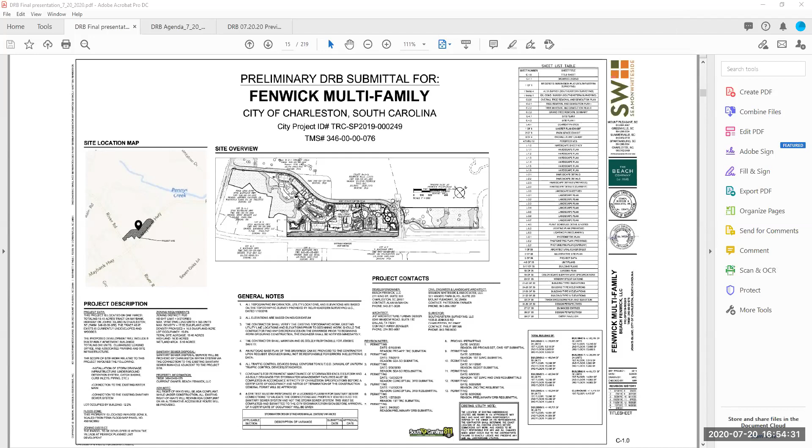We can look at the architectural sheets, starting with the elevations, if you would like. Okay, thanks. David, could you scroll to those, please? Sorry, elevations? Yeah, yes sir, if you could skip over the site.

Sorry, is this a good place? Yeah, if you could maybe go about the 10 architectural sheets to the elevations, please.

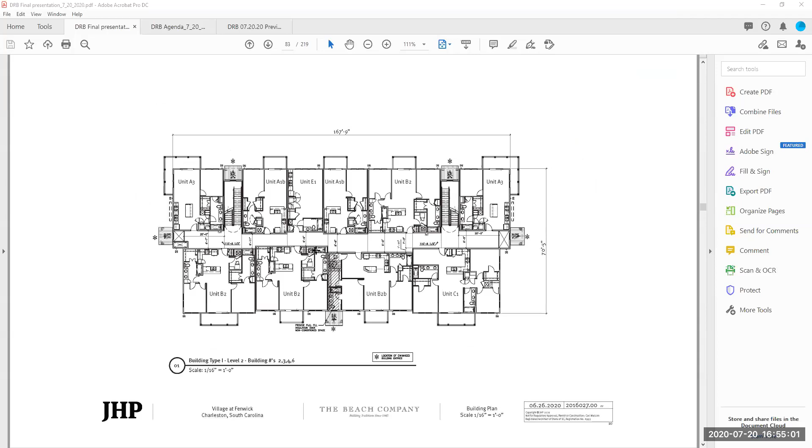It looks like Patterson's joining now. Patterson, can you hear us? Yep, I can hear y'all now. Can you hear me? We can, yes. Great. Apologies for that.

If you could go back a sheet or two to the color palette. Perfect. So from the last review meeting, some comments focused on the color palette for the project, as well as detailing regarding dryer vents and downspout locations and placements. We've updated the architectural package showing the color selections with representative images.

We've also shown the dryer vents and downspouts on the colored elevations, which was also requested. In addition, we provided a drawing for a trash enclosure and some additional adjustments to the proportions, batten spacing, and color callouts. For example, we're proposing coloring some of the soffits with Olympus white, that light blue color you see on the rendering on the south of the page. Let's go to the next PDF.

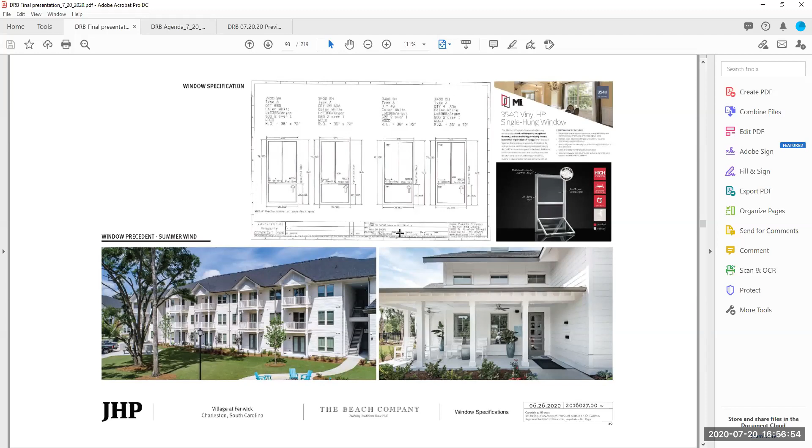If you want to flip through the other elevations - it's a little hard to see, but on the lower image, which is indicative of all the elevations, there's a little 'DS' signifying where the downspouts are. We tried to show them as best we could - they're painted white to blend in with the field color, so it was a little difficult. You can also see the dryer vents shown there, and the colors were adjusted a bit to reflect the actual color swatches we selected.

You can kind of see they're more of the same - downspouts, dryer vents, adjusted colors. You can see the drop beam on those corner projecting balconies was also picked up. So some minor detailing along those lines.

If you don't mind going to the trash enclosure, since it's a new drawing. The trash enclosure is added, and again we're trying to get it to fit in with the color aesthetics of the overall project.

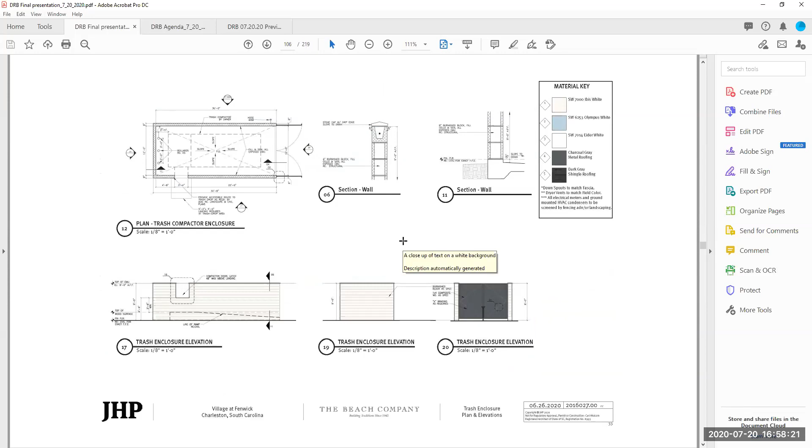If you go maybe one more page - similar here, you can see the drop beam was added at the top level of the wraparound balcony. Some of the soffit detailing is picked up with the batten trim and the colored soffit. You can flip through it; like I said, the majority of the changes were fairly minor.

Again, similar, showing some of the color palettes and soffit treatment.

How are you doing? Good. I'm in the middle of a Zoom meeting right now, but I can barely hear from the laptop. Let me tell them - excuse me, folks, I'm going to mute my system for a moment.

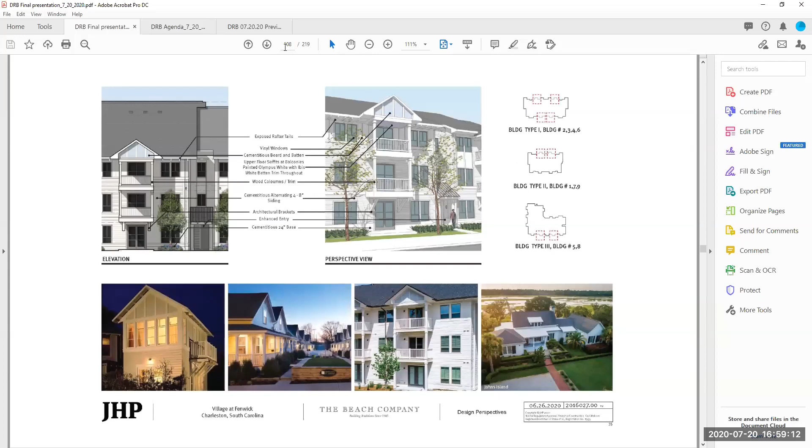If possible, could you go to the last couple of elevations? Does anyone else have access besides David? David, could you advance the slides?

David? These are the entry designs we've looked at before. There wasn't any major changes there, and that's true for the next couple of slides. So as I mentioned, the majority of the items were the windows, downspouts, dryer vents, and adjusting some of the colors and proportions a bit. I think that's really all I had to comment on. Thank you.

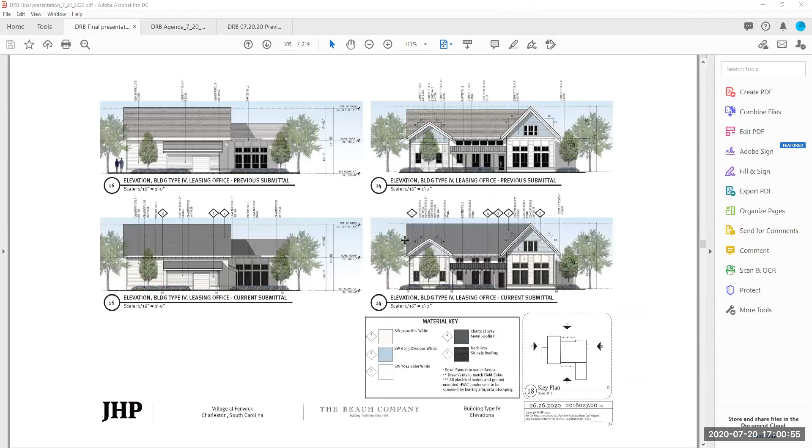Cecilia, if you want to direct where he needs to flip to. This is Cecilia Probst with Seamon Whiteside. Would you mind going back up to the beginning where the perspectives are? Sure, perspectives. David, could you scroll back please? The Lumion ones first, yeah, those - the first one.

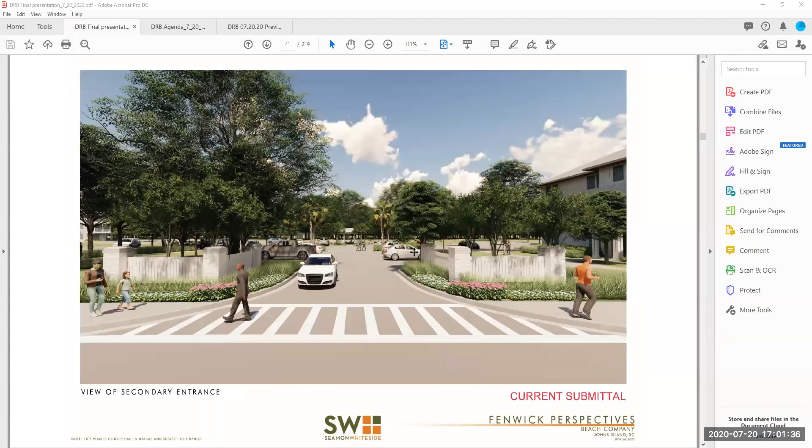The site plans. So we took your suggestions from the last submittal and studied the signage feature at the entrances, and came up with a new sign that we feel better complements the buildings and the color scheme of the architecture. If you move forward to the next perspective, you'll see before we were going with a darker gray one.

The current one is white to match the buildings. I don't know where the other ones are - you just had it there. So thank you for your feedback on those. I think the current ones we're proposing are much better. Okay.

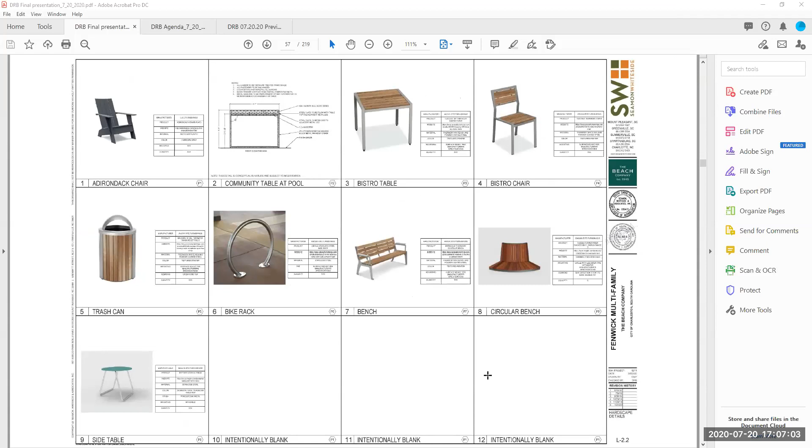I was wondering if we had elevations of the smaller park structure as well anywhere. This is Kirby at JHP. I thought they were included on the same sheet as the larger pavilion. Okay, I'd have to go back and double check.

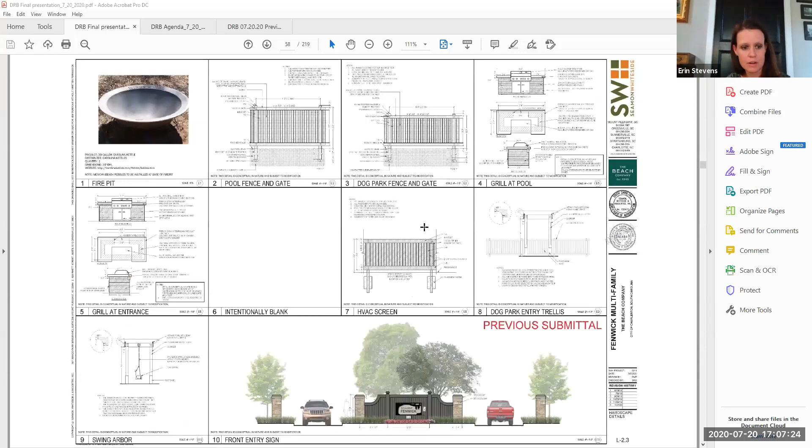David, if we want to pull that sheet up, it was the last page of the submittal for this project. I've added some things, but this was the last one they included. Yeah, it actually doesn't look like it made it to that sheet.

Is there, are you referring to the one at the end of the secondary entrance at the terminus of that? Because we do have it in a perspective, if that helps. Okay, yeah, if somebody could let me know the page number. That would be at the very beginning of the submittal.

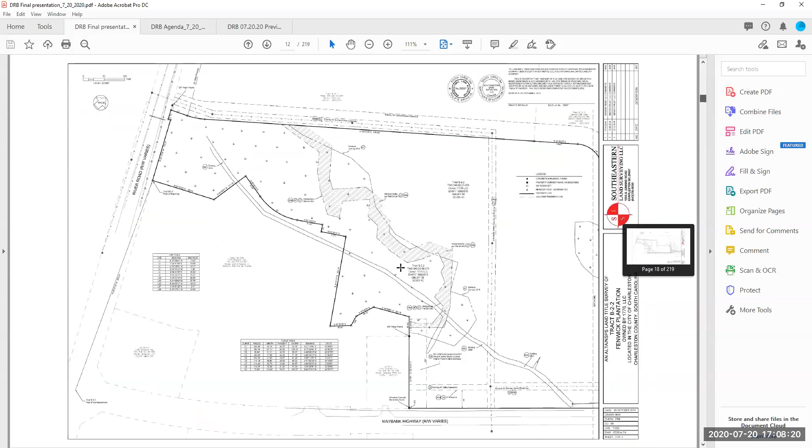Move this. Yeah Dave, I think in the back of those perspectives that we were looking at earlier, we were discussing the signage revisions. It's on page 32 of the submittal package. There, yeah, that one, you just had it. This one? Yeah.

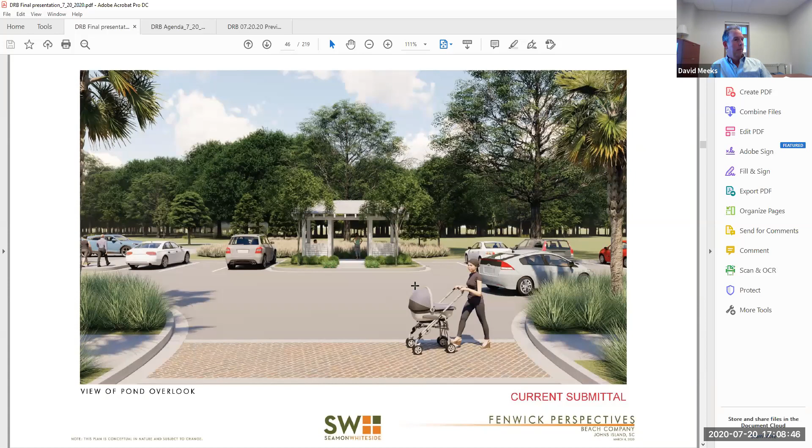Excuse me. Bless you.

Those are all the questions I had. I have a couple more questions. This is Jeff.

With the supplemental information that came in today's email about the exterior building lighting, there were 2 fixtures provided: one that looked like a round can on a stem, and the other a building-mounted sconce, black in color. I don't see where those are shown on the drawings, and I'm curious about the strategy for which one goes where. I presume we've only submitted 3 lights, these 2 plus the pole lights. Is there any other building-mounted lighting?

No. The intent is to have the lantern light at the building entry points, as well as the individual unit patio lights. The other light in this package would be used on the building where you need additional light, say at the end of the buildings where there may be dark spaces between building ends, used as more of a general building light as needed, whether for signage or to add additional foot candles to the site. But the intent is not to add a bunch of extra building lights on the exterior outside of these two types of fixtures.

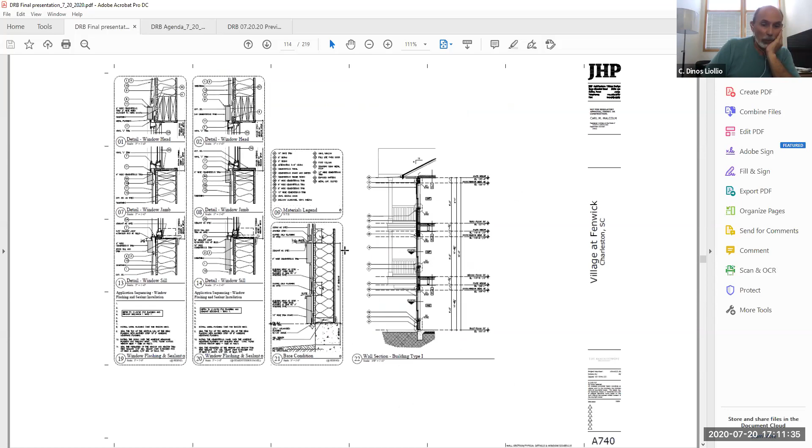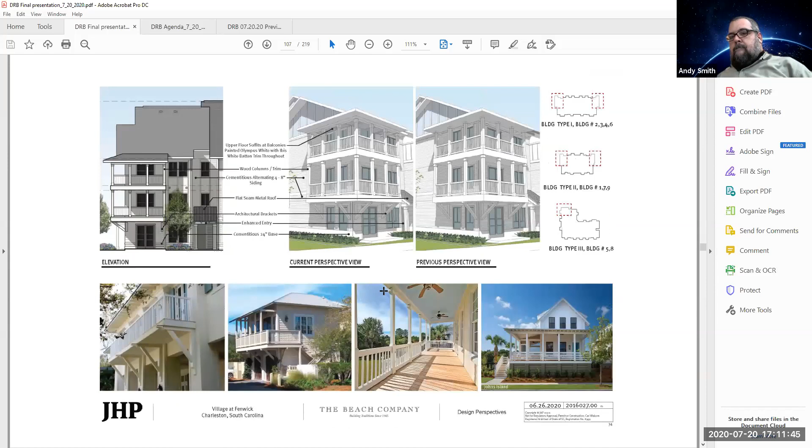Thank you, Kirby. This is Dinos Liolio, just a quick question, a simple one. On my drawings, it's the perspective that comes in after the view of the pond overlook, labeled view of streetscape. Is there a page number, Dinos? Mine shows page 32 of 98. It was an overall site perspective?

Yes, maybe in the civil streetscape renderings. It is in the civil renderings, okay, I believe that's where it's at. The question I have is very simple: there it shows a very light roof color. And when I look at the elevations, it looks a little bit darker, almost a charcoal or dark gray. What direction do you guys feel you're leaning right now? Because the lighter color looks really nice, and I was just curious.

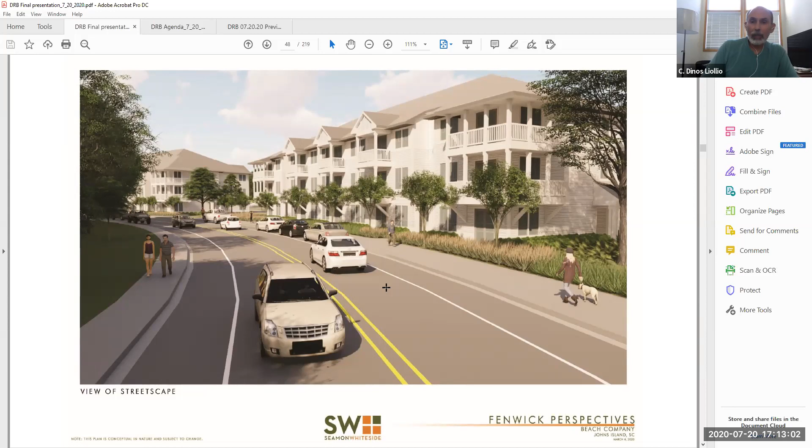Currently we're proposing more of a charcoal. The shingles have some limited color palettes, and some of those grays can wash out pretty fast. We like the idea of having a little bit more of a contrasted roof element with the kind of light and light blue color palette of the building. Okay, I was just curious. That's all I had, it's a nice project.

Any other questions? With none, we do not have anyone signed up for the public comment period, nor do we receive any comments on the city's website or via email. So David, staff recommendations, please.

City staff finds this is a nicely designed and well-proportioned project with well-placed amenities, the preservation of many grand trees, and nice site furnishings. Staff would like to see more specialty pavers at the secondary entrance, as was done at the primary entrance. Staff comment 3 is regarding the notches in the roof.

Oh, I have an illustration for this one. Regarding the notches in the roof of the building above the entrances, staff was first going to suggest to remove them, but then thought it might look interesting to extend the rafters so they are exposed in this area and connect to the eave. The rafters and the eave would be decorative in this notch. Let me point out where this is.

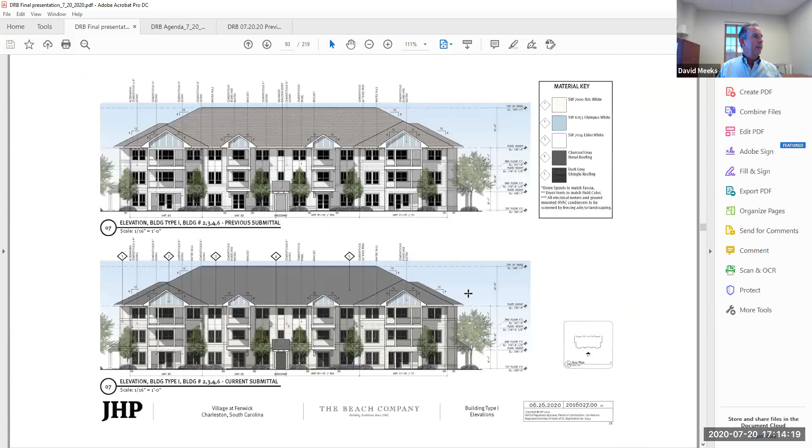So in these two locations, there's a notch above the entrances. We were thinking it might be interesting to have the rafters extend out here, just a suggestion. But that's all we have for staff comments, and we recommend preliminary approval.

Thanks, David. Board discussion. Kirby, or anyone from the team, do you have anything you'd like to clarify from David's staff comments?

No, ma'am. We can look at addressing the notch, see if we can do something a little bit different there. And that's only if the board adopts it. Understood. Thank you. Okay, thanks.

Then time for board discussion and a motion.

This is Dinos. The rafters are not exposed, is that correct? And the lookouts, they're all encased within, if I remember the details, within the context of soffit and fascia.

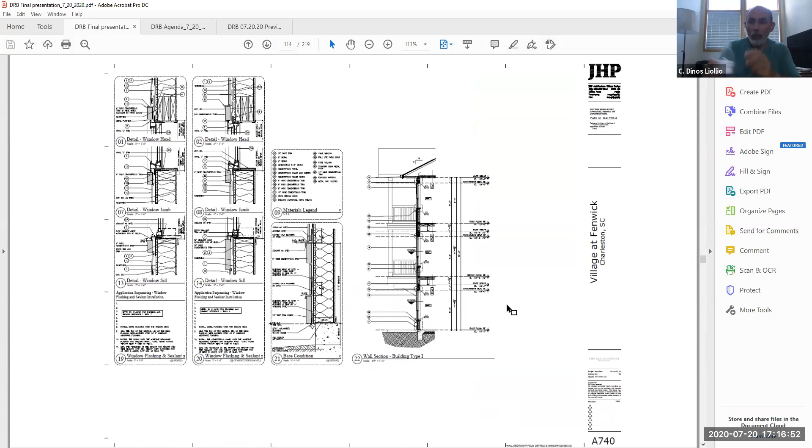The applicant had sent over some additional drawings today, and we were asking about the single hung window at our last meeting. I'm a little bit concerned that the windows, not having a great depth between the frame and the trim, might come across on the building as being a little more flat. Looking at our DRB policy, we talk specifically about the face of the window frame being recessed from the trim to provide depth, as if it were a traditional window. And the trouble with these single hung windows is just that the frame is very close to the wall siding.

In other projects, and you can zoom in on these details, would be a great example of the window itself being close to the trim. Any one of those, top left. Oftentimes in projects like this, the window will be set in one stud. You see that triple header there on the head, detail window head. There's three studs there at the head. Oftentimes a window will be set in at least one stud to give that a bigger offset.

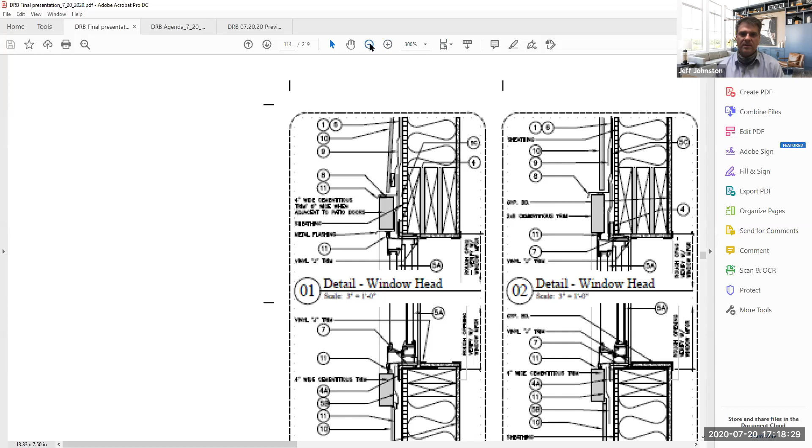That's the big concern for me: we've got a big building and these windows are fairly flat to the trim, and it would provide a little bit more shadow and relief if the windows were recessed back as per our policy statement on windows.

Yeah, I think it's a great point, Jeff. I think that would give a nicer shadow too to the overall building.

The additional sections here were helpful, and I appreciate that. Certainly would expect that, David, should this go forward in the final review, that he review these sections. The one wall section we received showed an enclosed or encased soffit, and Dinos, to your point, you asked if there were other porches that had exposed rafters, and the answer was yes, but yet the section that we have didn't indicate that.

So there's a lot of detailing to this building, and it's wonderfully detailed, at least from these very conceptual—I know the information presented is somewhat conceptual in nature. It's not until you get to the level of detail shown on this sheet that you really understand what things are and how they're executed. That execution level is important to the quality of this type of project.

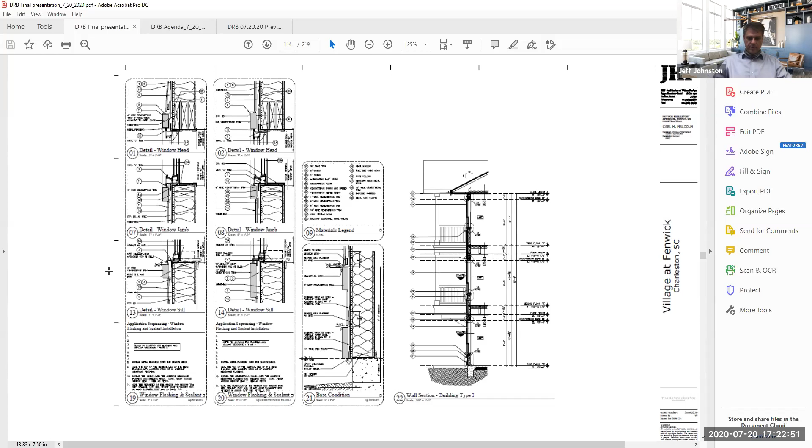Is there a motion? I'll make a motion for preliminary approval with staff comment number 2, I think that's the only one, and board comment number 1, to recess windows further into the wall cavity to provide shadow and relief for our policy statement.

Hold on one second, Jeff. I'd prefer those details to be shown back to the board, communicated to the board, I should say. Recess windows further into wall cavity to provide shadow and relief in accordance with the board's policy statement.

Submit section details of all building conditions. Provide a lighting plan that shows locations of all building mounted lights, not signs, lights. And then eliminate gravel as mulch and use natural materials. That's it.

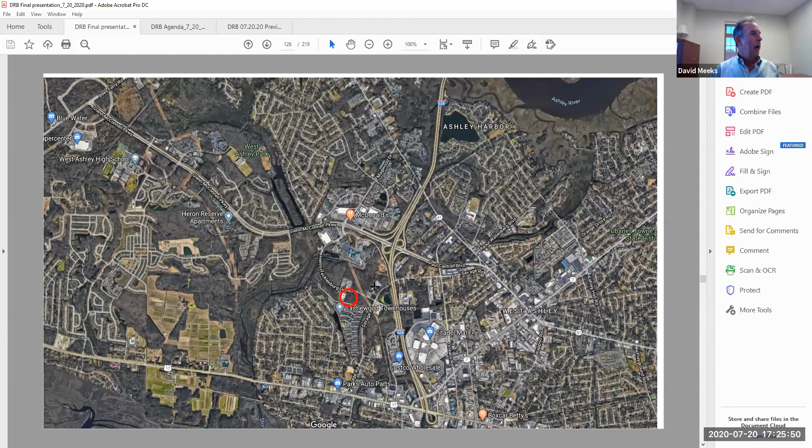We will now be moving on to agenda item number 3, 2280 Henry Tecklenburg, requesting conceptual approval for the construction of a new 1-story dialysis center. This is a new project. For those who haven't seen this, the red circle is the location on Henry Tecklenburg. Here's a closer view, and this is looking into the site. It's currently wooded. That's all I have, so I'll turn it over to the applicant.

Okay, this is Randy Dover. Can you hear me? Yes. Okay good, Ken, thank you. I appreciate y'all's time today to go through the project. Is 10 minutes about enough time for you? That's plenty to go through this initial presentation. Okay, great, thank you.

Quick overview: the site is at 2280 Henry Tecklenburg Drive. It's adjacent to a memory care facility, the only other project on that side of the street for about a 2-3 block area, with one across the street as well. The site is 2.391 acres as we now have it determined. The owner is Dialysis Clinic, Inc., the largest not-for-profit dialysis provider in the country, with over 300 clinics, including several in the Charleston area, including one over 38 years old that this one will replace.

They're a good neighbor, been there a long time, and intend to stay. Their patient load continues to grow, sadly, and they need a new facility that can do things the current one can't. So we're looking at this site. My firm is based in Nashville, as is Dialysis Clinic, Inc. We've done over 500 dialysis clinics in 38 states, at least 11 in South Carolina, so we're used to working all over with a group of people who know dialysis well. We also want to be good neighbors and do projects that are long-lasting and well-accepted. DCI isn't going anywhere; they'll be around a long time and want this to last. We want to follow your standards as best we can.

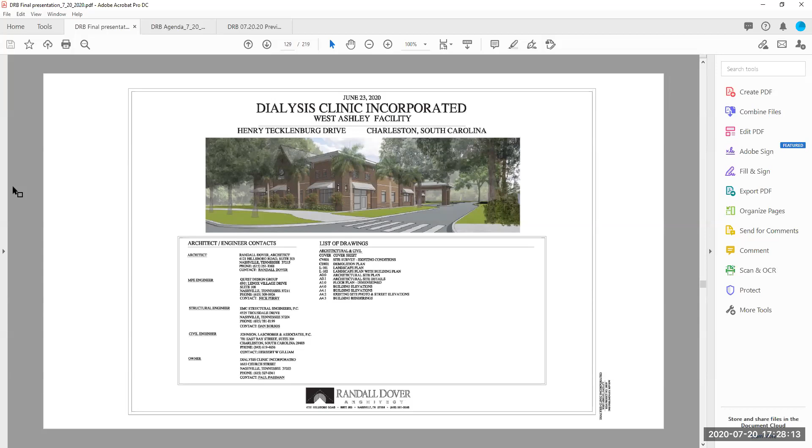This building is 13,419 square feet in size. It will have 30 patient treatment stations and a home dialysis treatment area, with 2 home dialysis training rooms. When you look at the site plans, we're on a wooded site, and one thing that came up quickly was the driveway across the street for another facility—we needed to line up our driveway with that one.

And so we're set up for that to happen. What happens with dialysis patients is they're typically dropped off. It's a 4-hour treatment, and most people are either dropped off or a van drops them off from a medical group or something, and then they come back 4 hours later and pick them up.

So we have 41 parking spaces in our most current site plan. Our civil engineer's been working with your folks in the civil review side of all this. And you're seeing here the landscape plan that was submitted previously with our site plans.

There's an area in a facility like this, dialysis clinics, they have a need for probably at least once a week an 18-wheel truck to get onto the site and drop off supplies and materials and then get back out, and they usually do that away from patient hours. So we're set up for that to happen. There's a dumpster and all those kinds of things. We also have a permanent generator on the property to provide power in an emergency, or if you have a power outage in the area, we can still dialyze patients.

Other outside features include a small pavilion for some of the staff to take a break outside of the facility. And again, we're going to landscape this thing very heavily. We want it to be like a park for both patients coming on and off the site, as well as the staff who will be there.

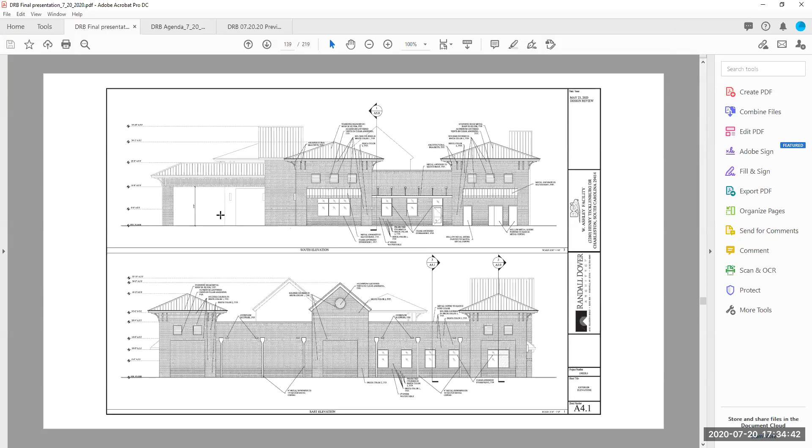So describe to me again what's happening. Yeah, in that top elevation you're seeing there. I'll tell you, go to the next page. One more, that one. The bottom elevation there, that's the side on the, I guess that's the west property line.

Again, it's all heavily treed down through there. Our roof will slope towards those downspouts you see on that side. We'll be collecting water there from the roof and taking that down underground to the water detention area in the back. Stormwater, a low slope roof. I gotcha. Yes, yes, yes.

So all these gable projections or masses, are they tall parapet walls? Is that what's happening? Like that one on that bottom elevation, the one that's kind of ghosted out in the background, is that it? Mm-hmm, it is. I mean, all those are like little towers and stuff that go back on top of the roof.

You're right, I'm sorry. You can see maybe in that section or the upper one there how the roofs go back a distance over the other roof. All the water from those roofs will be guttered and go around and drop onto the main roof, that's the low slope roof. The only other one, the portico, share, we'll have downspouts on that that'll also tie in underground.

Explain to me, I have a question too, it looks like you've got some spandrel glass on some of the elevations, I think on this bottom right tower element, and then on the other elevation too. Can you point to what that is? Sure, what's happening, some of those, what we're trying to do there is some aesthetics. The windows all, the building looks good, but we've got rooms where we just don't need windows, water treatment rooms and some of the supply rooms and things like that. We've got windows with spandrel glass on them, so at least as you drive by and look at this it all looks the same, but that isn't vision glass.

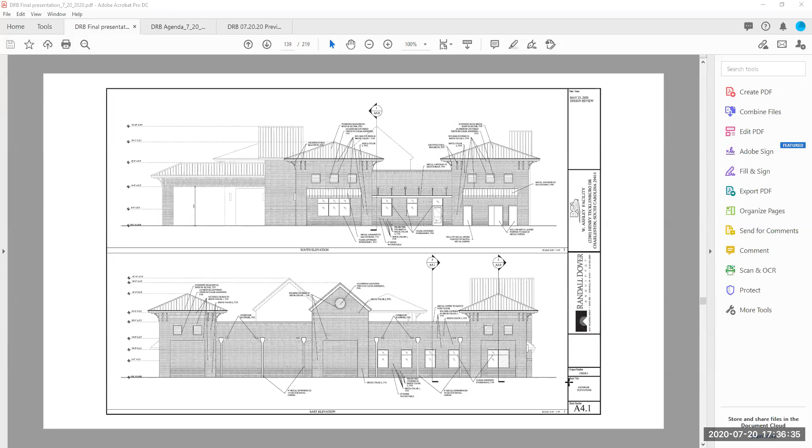And some of the windows in some treatment areas, if we have a 10-foot ceiling, everything's vision glass, but if we had a 9-foot ceiling, then the upper one may be spandrel and the lower one is vision glass. So in this, can you look at, David, can we go to the plan and explain where those are? Yes, sure, the floor plan? Yes, sir, floor plan. Back.

Right there, that's it. Let's see if we can follow this one. The porte-cochère is there, you see those two little columns floating freely up on the top. That's the east side of the building.

Right below those is our main entrance into a waiting room, with windows into that room. That's where patients come and essentially get checked in. They're brought through the door on the right out of the reception room into a patient prep area. There's some scales, which is important, since patients are weighed there. Then they move over to the whole section to the right.

That's the main patient treatment area. The idea is we have 30 treatment stations, and everything in there has a low wall so nurses and techs can see every patient, see their face, and know they're doing okay throughout the treatment. They have to keep an eye on them legally.

So we have these arranged in groups of 4 for the most part, and the techs and nurses on the floor can see everyone. We have windows - basically all the windows around that whole area are vision glass, unless they happen to be like in a bathroom, like the patient bathroom next to bay number 1.

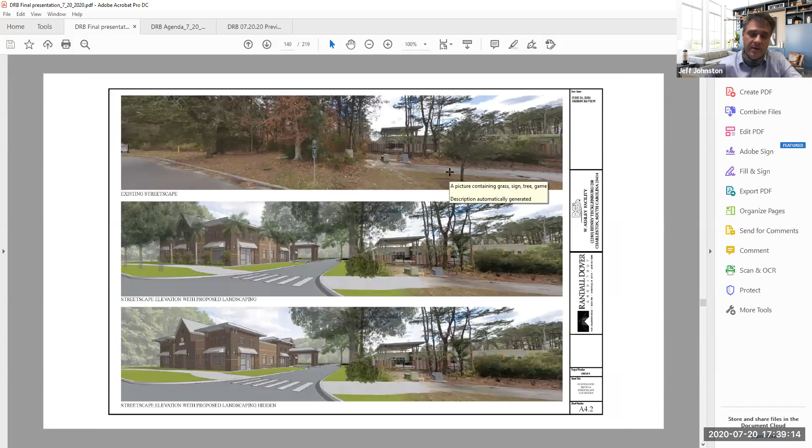One more question, site related - I think you mentioned the finished floor is a couple feet above the natural grade there, or actually 3 feet. And is the strategy for the parking lot to fill so you come in at the same elevation as the site? Are you filling the site to achieve that?

The civil guy can answer that better - I don't know if Herb is on here or not - but the idea in my mind was the building pad is up higher, and on the main drive we drop off people at the porte-cochère. Obviously we build that up, so that's a flat drop off - we don't want them tripping. Lots of these patients are in wheelchairs or on walkers.

That's not unusual at all. The back can drop back off where patients are and stuff like that. So I don't see us bringing everything up to that height, just mainly the building pad. Then the parking behind the building, where we have several more handicap parking spaces, will be up a little bit higher, but then we'll slope down to the area from there.

Do you recall what the flood elevation is? I don't remember the number right now. Jeff, the existing topo is around 9 or 10 based on the survey. Okay, thank you - I know part of it's an X, part of it's an AE.

I couldn't find it - yeah, we got two groups. Is that AE 13, Erica, or is it something else? I couldn't find it, I just saw it labeled AE - it didn't have the elevation. I very well may have missed it.

Randall, do you know what the flood zone is? It's in 2 flood zones - there's an AE and an X. The X is... let's see, the building itself probably touches into the X. That's actually in the northeast corner of the site. Right, so you would be compliant for the balance of it.

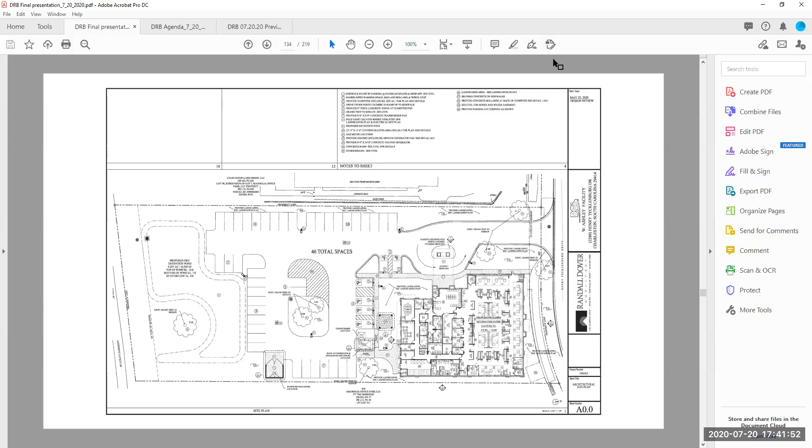Well, yeah, it's 2 foot below his finished floor. Do you know what your finished floor is sitting at? It says 13, it's changing right now. Herb's been meeting with the group doing the DRB, the TRC review. They've come up with some things as of last week. In fact, the site plan showing 46 spaces, I think it's really 41 or 43 now. They've reworked some things to make the grades work better. Do you know how many spaces are required by code versus what you're providing? Yeah, I think 41 is what we've determined. That's okay, 41 is required by code, or is that what you're providing currently? I think it's provided, it's required by code, and it's what we're providing.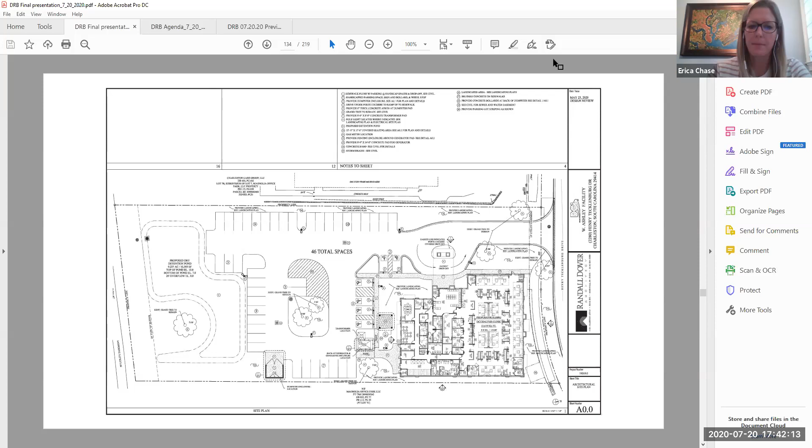Okay, are you finished Erica? If you flip to the landscape plan, which is either just before or just after the one you're on, I noticed that some of the parking spaces are hatched but I couldn't find a label. Are those going to be permeable pavers? Yeah, it's some kind of permeable paving or pavement. Okay, and we're working on that as well, trying to take advantage of all those things and do what we can to take care of the water on the property. Okay, thank you.

Have y'all been through BZA? You mentioned that you have some grand trees that are coming out. Yes, Herb's been talking with the guys about the trees and everything else. I think we're all on the same page with what we're keeping. There's a page or two further over to the left that shows what's existing and where the grand trees are, and which ones would come out. No, I guess what I'm asking is, has it been officially through BZA? Yeah, the meeting itself with the board.

No. Okay, have you been through TRC? He's doing that, has he done it yet? Available right now, he should be on this call. Does he show up on there as a participant right now? He is, yep. Herb, can you hear us? Okay, I got a couple messages from him here, see what he's saying. Let me ask him, I'll put him on speaker. I like it. Yeah Herb, are you available to be on the meeting? Okay, he says every time he talks it doesn't allow him to talk, he keeps getting muted. He's shown as unmuted, yeah he's showing to not be muted. Herbie, you got something muted on your end? No, I clicked on unmute. All right, so, I can hear. We can hear him that way if that's okay with everyone, if that'll work with you guys. Yeah, I've got him on a cell phone here, at least he can talk. Okay.

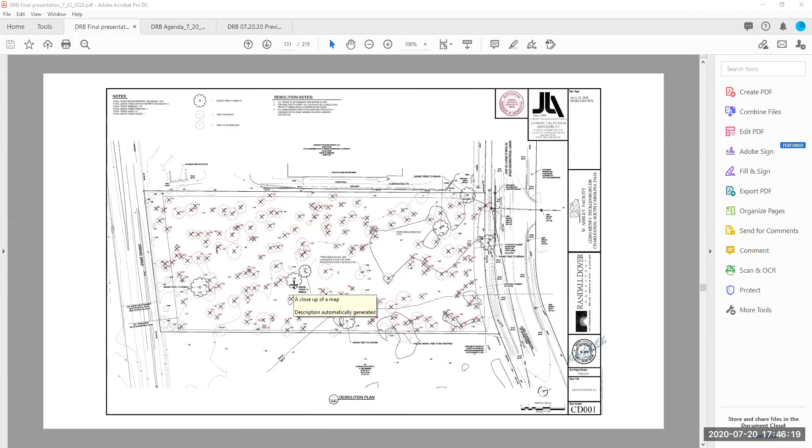Herb, could you state your name and company for the record please? Oh sorry, Herb Gillum with Johnson Laschober Associates. Thank you. Any other questions?

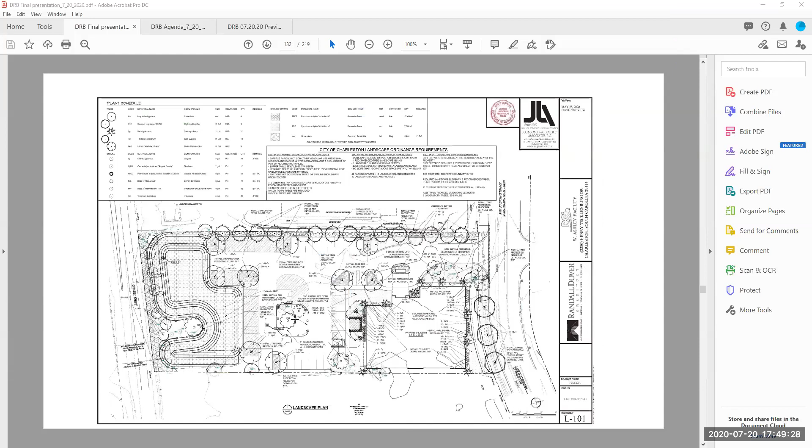This is the original site plan, but it's been asked to be changed at our first TRC meeting. So we changed that and shifted the island so there's no longer a row of parking running parallel to the building — it's now a full island going toward the detention pond. When we did that, we had to take out one of the grand trees.

Okay. So it's the smaller of the two, up on the right. That's the triple-trunk one. Yeah, and it's splitting apart.

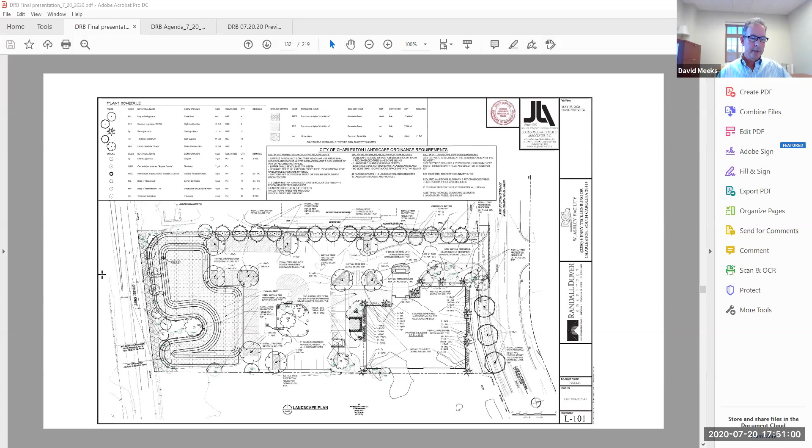Number two, staff was wondering why the building is so tall if it's only one story. The amount of space from the top of the windows to the roof eave is a little awkward.

Number three, staff likes the large overhangs of this design, but the brackets need to be larger scale for this amount of overhang. Staff comment four: staff would prefer the brick be all one color rather than two-tone.

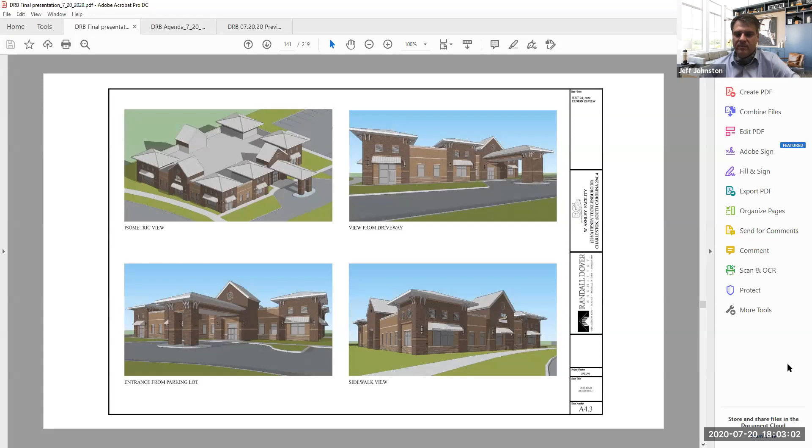One of the challenges I have with this particular design is that the gables are facadal, and when you get to the roof, they become just walls, and they become very, very tall walls at that. I personally would encourage you to let the mass be the mass, and try to find a way that it conveys front to back, rather than doing these almost like Western stage fronts. Let the masses be more genuine.

So I think I would support that. It's a start over.

Henry Tecklenburg Drive has become this really neat collection of buildings for the Charleston area. It's an interesting collection of mostly medical buildings that have some unique form to them that speak both to, I think, the region and also have a little bit of funkiness to them.

I would say that if this were to be built like it is presented, it would probably be one of the more staid examples of architecture. And I think the street, the context can support a more, I don't know what you'd say, just a different approach to architecture. I'm not saying it has to be traditional or contemporary. I think there's probably some other issues with this design than can be labeled with those two labels.

But I would say form needs to follow the function. I think that as you begin to look at the change in elevation of the building, it may begin to suggest something lighter.

And possibly the brick is retained, but there's a wonderful and interesting material palette along Henry Tecklenburg that can be drawn upon. But one of the things we've all continuously pushed, as Jeff was just saying, is a very simple architectural expression that's more prevalent to the area itself. You're not downtown Charleston, you're not in an urban area.

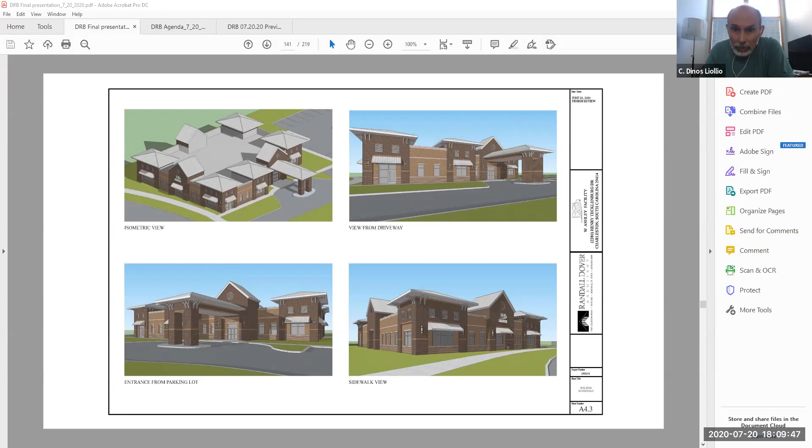Such as an expression of, sorry, I can't remember the name of the space... the treatment area. Sorry, to emphasize aspects of functions of internal spaces, specifically the treatment area, as an example.

Simplify the design, and just be honest in the vertical expression. And then finally, be mindful of the material palette of nearby buildings that might provide inspiration, but primarily move toward a design that lightens the building visually.

Andy, say that last statement again. Yeah, that move toward a design that lightens the building visually. Thanks.

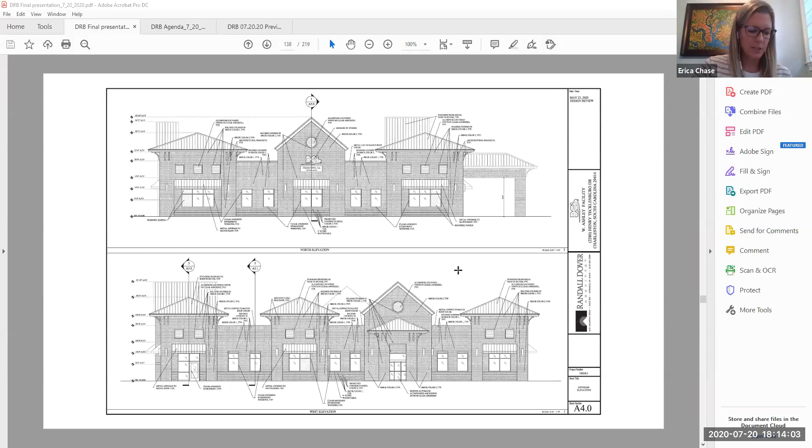Moving on to our next agenda item, item number 4, 1325 Folly Road, requesting conceptual approval of a new car wash.

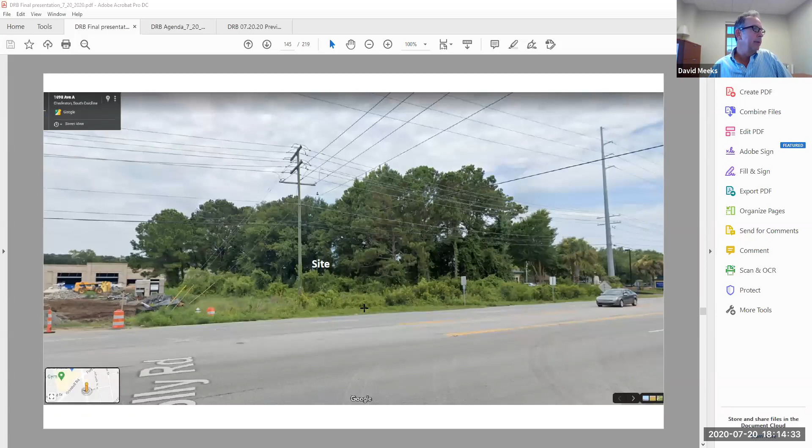I've got just a little bit of context to show you where the site is. Here you can see the overall location from further back. The closer view - this is next to the new Publix development that you're all familiar with. And looking into the site, you can see to the left the Publix under construction. Looking into the site again, and this is looking through the site back out to Folly Road. And then this is the existing bank just to the north of it. And with that, I'll turn it over to the applicant.

Good evening, my name is Denny Gappins with Progressive AE, and we're the architects for Fins AAA. Before I start, has Thomas Durante been added? He's our civil engineer, and I'd like him to give a brief overview of the site before we get into architecture.

Linda, could you move him? Thank you, he's being moved in now. Denny, will you need more than 10 minutes approximately? We will not. Okay, thank you. Let me know when to advance, Denny. Okay. Linda, could you unmute Tom Durante, please? There we go. Perfect. Tom, you there? He's showing up and is unmuted on our end. Tom, can you hear us?

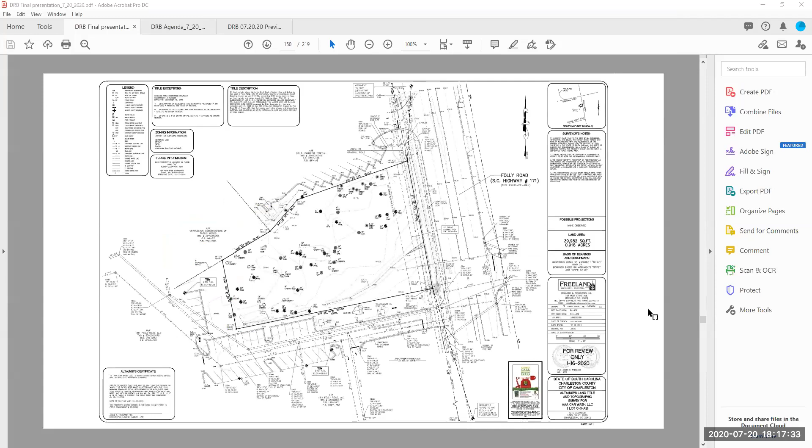I won't get into too much detail on the civil stuff. If you want to hit the next one, David, and keep going.

So this is our second car wash in Charleston proper. The first one we just completed is in West Ashley on Savannah Highway. This is an extremely tight site, just like that one was. So we've begun with the tightest footprint of the building that we can, and it still be functional for the owner. This building is indicative of that reduced length that we had created for the West Ashley site. And even at that reduced length, we were not able to rotate this building and get it parallel to Folly Road, which was requested by staff at a pre-app meeting for us to look into that. So even with the smallest footprint, we have to keep it perpendicular to Folly Road in order for the site to function.

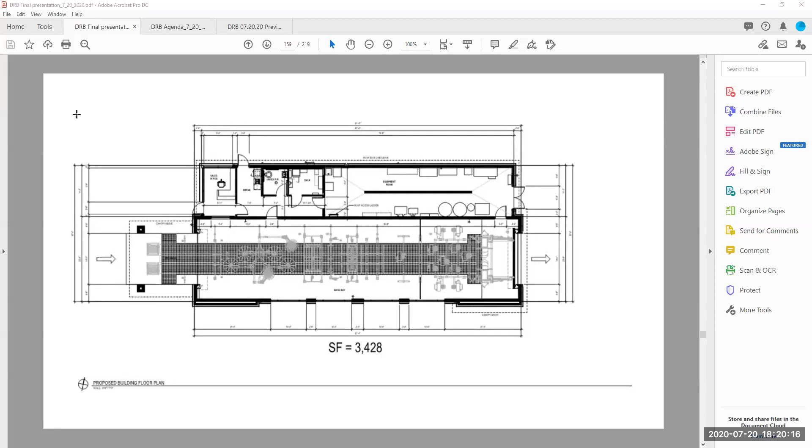So as mentioned, we started based off the site constraints and the site program. We started with a very compacted program, and reduced the square footage as tight as we can while still allowing for functional use of the program elements for the owner. We do have that short length tunnel that we had developed for the West Ashley site and used that as the starting place here.

So taking you guys through the elevations, this is on the front facing Folly Road. We've done a tower element at the tunnel exit, clad in architectural brick veneer, and at the top accented with painted horizontal board and batten siding to add a little detail and texture. To the right, you see the lower volume that we've changed the parapet height on in order to break up the massing. This also is the equipment and back of house spaces for the plan. Here we chose a cement board lap siding and a simple shed roof.

We're gonna hit the next one. I should have mentioned when we went and did the pre-application meeting with staff, we asked what their preference would be, having just gone through the DRB process for the West Ashley site. Do they want us to use the architecture of that site as a starting point, or did they prefer that we come up with a unique architecture for this site, and they chose the latter. So if there's any recollection of the West Ashley site, you'll see that while the massing is similar because it's program-based massing of the building, the architectural language is a departure from the West Ashley site, so it does have its own unique character.

So as we move around the building here, to the south, this is actually fronting the parking lot of the Publix. We've introduced punched storefront openings into the wash bay, and again took the tower architecture and wrapped it around the front corner there. At the far right of this elevation, you can see the 4-foot high brick screening walls that are represented on the site plans.

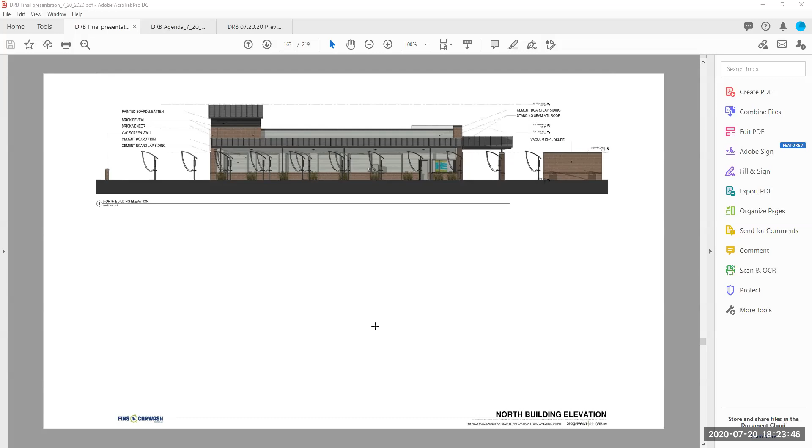That concludes my presentation. Thank you.

Was Thomas able to join us with the sound? I think he was having trouble on his end. He called in, but he's not speaking through his computer, and I think that's what got brought in. I think he has a call-in number, and he's taking the meeting on his phone. So, unless there are specific questions for him, maybe we can leave it as is. Okay. Are there any questions for the team?

This is Andy. The screen wall that y'all have in front, is there a reason that it is a straight line? Is there anything that precludes it from that? It is just a straight line. It's actually broken into 3 separate runs as well. If David, you could take us back to the site plan, please. You can see it's the first length of it's broken by the sidewalk that connects the site to Folly Road. And then there's a third section to the right of the drive. I understand, but are there any easements on the Folly Road side that would preclude it from having movement in it or anything like that? It looks like it is up against a setback. There's an overlay there. But...

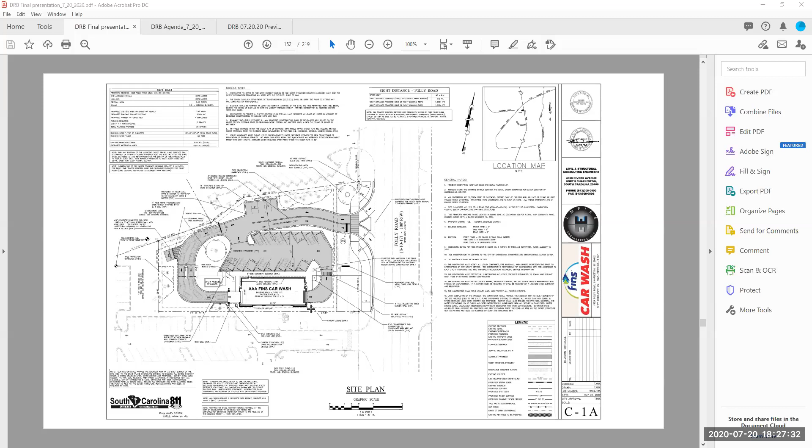I guess, I mean, I was looking at the playfulness that you have on Savannah Highway, and then I'm looking at this project here, and understanding all of that, and understanding that this is a car wash, and understanding that you have such a variety of different models, cars, years, everything coming in. I was just curious. You'll probably hear that comment again, but I was just looking for a response. Thank you.

Any other questions? We do not have anyone signed up to speak during our meeting, but the city received 2 submitted comments prior to the meeting.

The first is from Nancy Hadley at 1214 Grimsley Drive. I'm going to try and summarize what is relevant to our meeting. Both of the submittals were against the project. She talks about traffic and safety, and talking about use, which is not in our purview. And that's really it, just against the project in general.

The second is from Cameron Mitchum at 959 Godber Street on James Island. They are strongly objecting to the use, which again is not in our purview, and also citing traffic concerns.

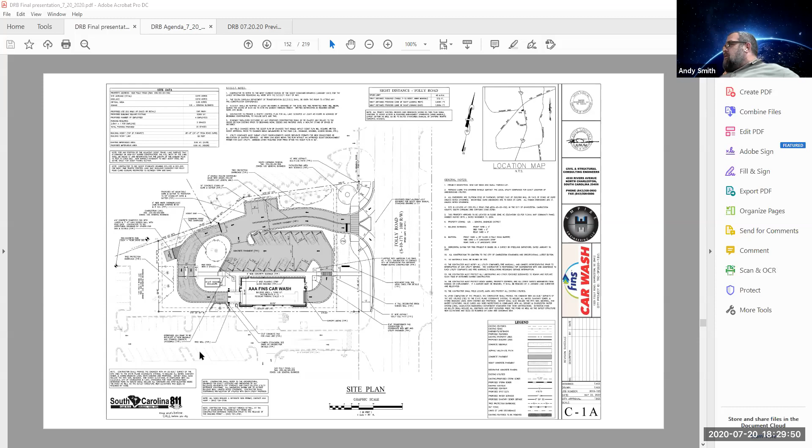Would it be helpful, David, would it be helpful for me to read your staff comments? David? I was saying yes, if you can hear me.

Okay. The staff comments are: one, staff feels the site layout needs work and that the long end of the car wash should face Folly, so you are not looking into the tunnel from Folly Road, as well as a service door that faces Folly Road. We feel the attractive south elevation of the building is facing inwards to the site and should face Folly Road. Two, we feel that the slanted tower feature of the building should be eliminated or simplified. Three, staff would prefer if the building were all brick and no siding. Four, regarding the south-north elevations, if the tower is removed, staff asks that the two brick ends step up higher than it currently does from the middle portion of the building.

And staff recommendation is deferral based on those comments.

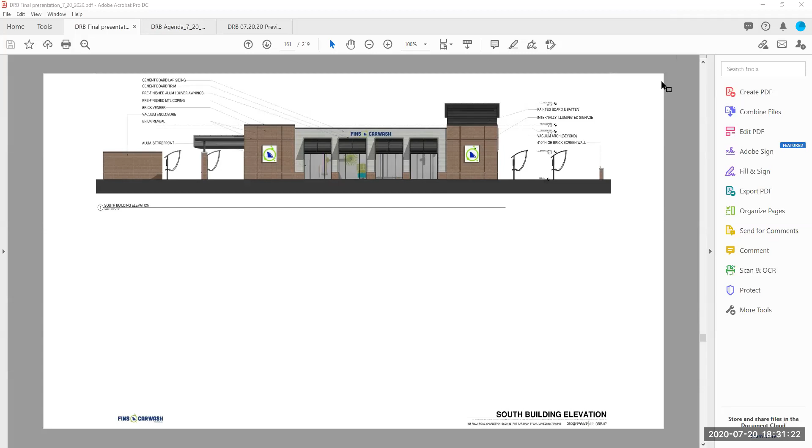Clarify or respond to between the public comments and staff comments. You don't need to go through everything one by one, but just any general or major clarifications. We did have a traffic study done, so that's handled at TRC. That's not our purview. Okay, no, I don't think I have any questions.

With that, we are in board discussion and motion.

I'll start off since I opened it up. One of the things that has been so successful on a few of the car washes we've seen before us, particularly the one further down on Savannah Highway across from the CVS store, is a playfulness. It's not so serious, and I feel there are grand opportunities as far as these little structures are concerned that could provide a sense of function.

It just comes off very serious. You have two very interesting horizontal bars coming next to each other on the floor plan, and yet you kind of lose that in the translation vertically.

I think it's the west elevation, whichever one faces Folly Road, the smaller bar to the right with the hollow metal doors with louvers, I don't think is what we would encourage the community to see as the face of the building. There are just a variety of issues here. It's a cool little jewel box that could be developed even further, and I think this architect has the capacity and ability to translate this into something so much more fun.

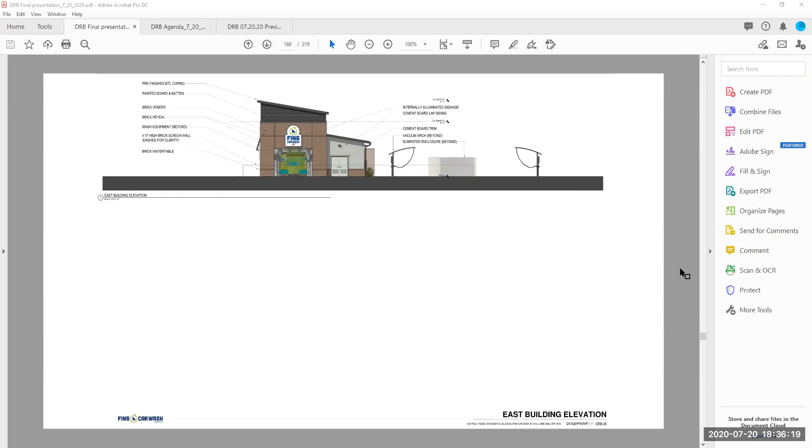If I recall correctly, the first submittal, maybe two submittals, on the West Ashley design was oriented this way as well. There might have been one, and then we had a submittal that didn't quite have it 100% parallel until we shortened the wash tunnel.

Right, Denny, sorry, we're in board discussion time, so if we have a question we'll let you know. Okay, sorry, that's okay. Yeah, thank you.

I think we are kind of missing something. As you said, this is more the service side of this building than the front door. There's so much more opportunity, I feel, and I know this firm has the capacity and ability to really address it. Something on this scale gives you wonderful opportunities to make it a really interesting structure.

One other comment about site design: it seems like the sidewalk does its best to get out of the multi-use path. Go back to the site plan - the sidewalk shimmies right up next to the back of curb, and it might be a better experience if it were to come off the curb a little bit.

I'm not sure if that's a requirement or if that's just how it was and we're just replacing what it was, but it would be helpful if that sidewalk were to come off. It just feels like in general there's a lot of pavement for this little site. And Andy, your point about the site wall not having room to move, maybe it's too much to ask of this site.

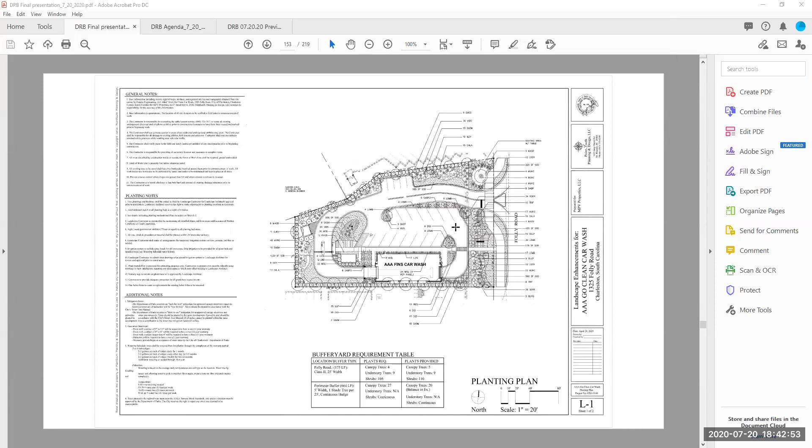Any other comments or motion? How do you guys feel about — I made the comment before about a more playful solution, something not nearly as serious with all the masonry and everything? Am I off track?

No, I think that's a direction to go in. It does feel — I don't know if dour is the word to apply to a building, but it does feel very serious, to follow your train. I do think there is some playfulness that could work, especially where it is.

Yeah, I think it depends on how it's interpreted. It's like when we have gas stations - it's preferred that the C-store is street side and the gas pumps are behind. And if they can't be that way, then the architecture has to be excellent.

Go ahead, Jeff. I was going to say the car wash on Cosgrove that we reviewed and has since been built - that one was oriented this way, but because it preserved so many existing grand trees, it was a very unique circumstance that warranted it. Also the view traveling on that side of the street was facing the main facade as well.

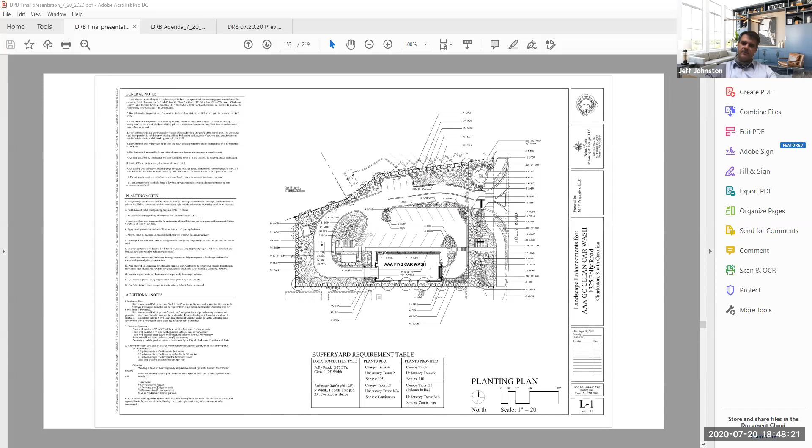I'll now call roll. Aaron, you're muted. Sorry, I was thinking about my response. Yes, in agreement. Jeff? I am in agreement with denial. And myself, yes, in favor of Dinos's motion as well.

All right, thank you all very much. We're moving on to agenda item number 5, Glenn Mcconnell Parkway at William E. Murray Boulevard, requesting preliminary approval for a new 4-story multifamily project with 4 buildings and 348 units. You all have seen this project a few times, so I don't have any additional context. If the applicant would like to begin.

Hi, this is Catherine Monroe with Housing Studio, the architect on the project. Do we also have Cassidy Michaud from DPR? Yeah, I'm here. Can you hear me?

Yes, all right, great. I think we can start out - Erica, if we can just get a few extra minutes, just in case we go long today. Sure. Yeah, I'm with virtual, I won't be too crazy strict on you. Okay, much appreciated.

Like David said, we're here tonight seeking preliminary approval for the Founders Yard multifamily project. Appreciate your time and consideration this evening. My name is Cassidy Michaud, I'm a landscape architect with DPR Associates, and I'll be walking through the site plan updates and refinements to the landscape architecture design. Catherine is with Housing Studio, she's with us tonight, and she'll be walking through the architecture. So, David, can you go to the next slide, please?

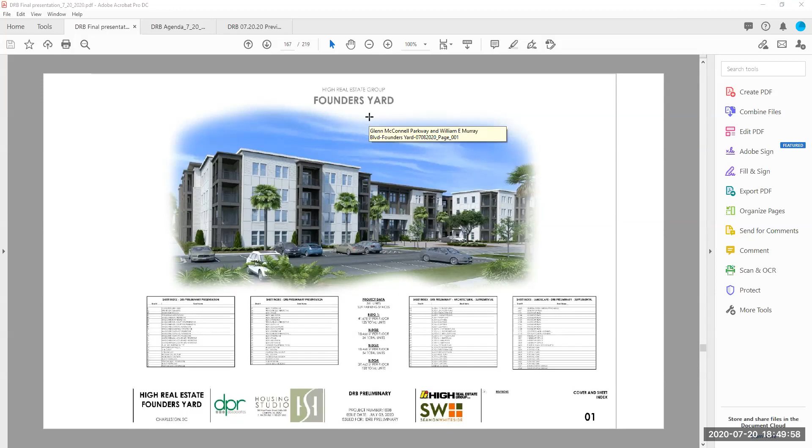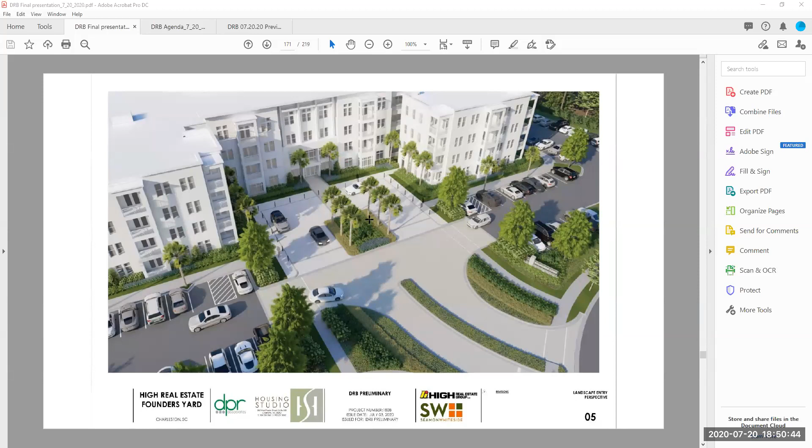So we'll just walk through the site and these entry perspectives. This is an aerial perspective of a view as if you were over William E. Murray Boulevard looking into the site, and here you can see the different material combinations we're using to define that entry sequence and the vehicular pedestrian plaza at the main building entrance.

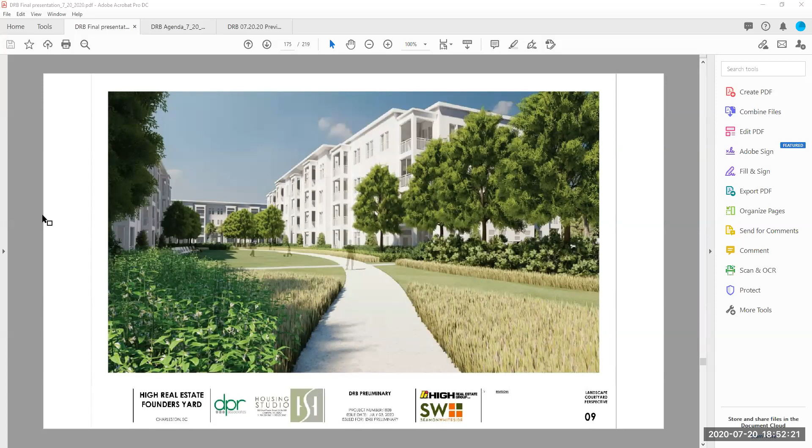So this is walking out of that courtyard towards building 4. You can see the pedestrian realm created and framed by the architecture of buildings 2 and 3. Also note the enhanced landscape screening we're including on the left and right of the view to screen those parking fingers and really define and create that continuous pedestrian path through the site.

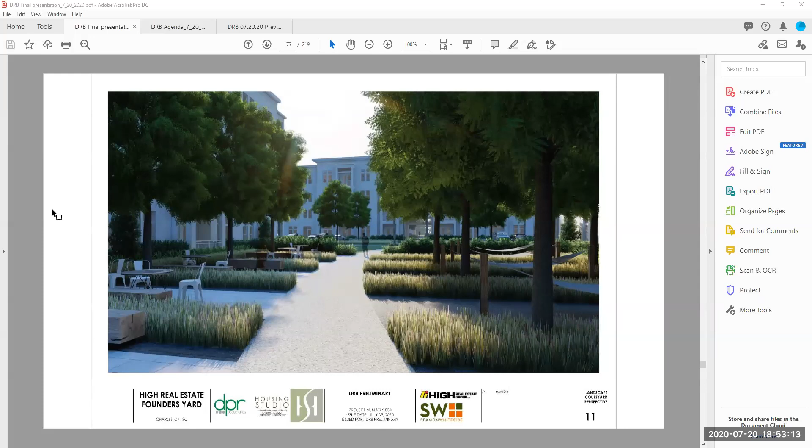Again, this is the courtyard between buildings 2 and 3, showing the approach as you're approaching building 4 in the distance. You can see the breezeway connections through building 4 back towards the tree save area and the dog park, some of the passive recreation we're creating in courtyard number 2, and also the landscape treatments that are starting to screen the parking areas.

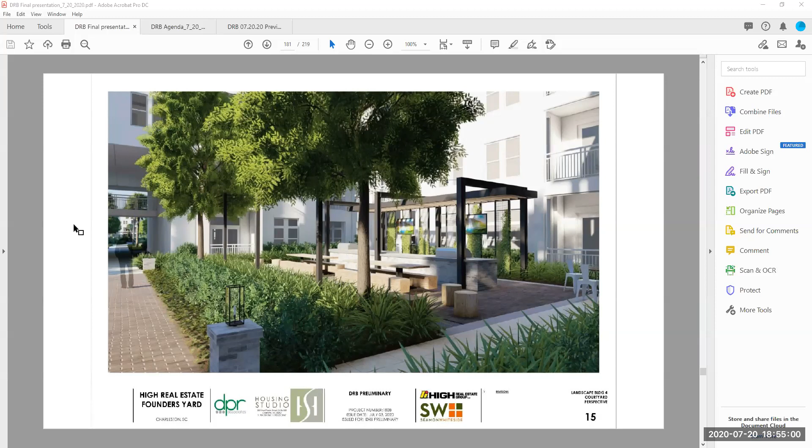This is just a ground level perspective of that - to the left of this image you can see through the breezeway out back towards building 1. You can also start to see some of the material combinations we've been developing and some of the vertical elements in the landscape.

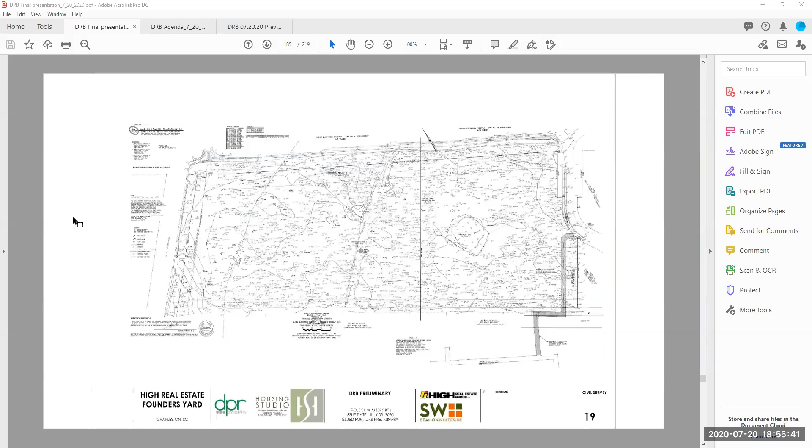Next slide. So I think these next two or three images, David, if you can just go through—these are just the civil site plan updates, photometric plan—and Catherine, if you can take the reins from here.

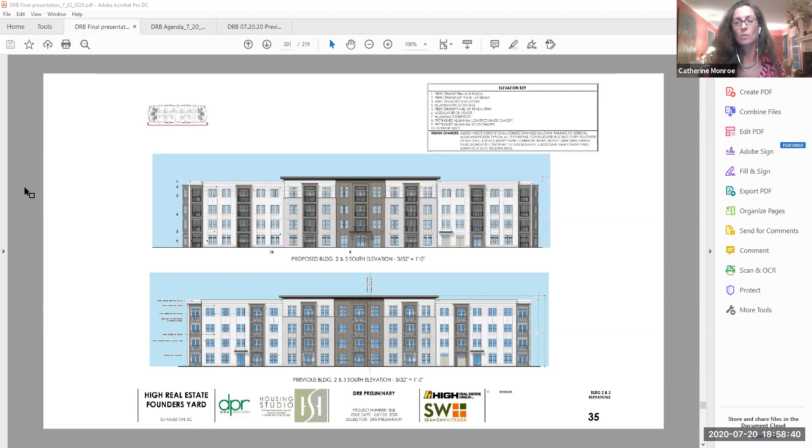David, can you advance to slide 35, please? So you can see here the changes from the previous elevation and the proposed. We've consolidated the building entrance from two down to one, into this main entrance in the center element, incorporating an implied hyphen here in the center, with the canopy over the entry in the center element, which focuses your eye more towards the center of the composition. And then we've shifted the vertical darker balcony stacks that are on the side flanking elements to the center bay, just to simplify the rhythm here. We've also added some darker elements, rendered in fiber cement panel, as bookend elements to both of the short elevations.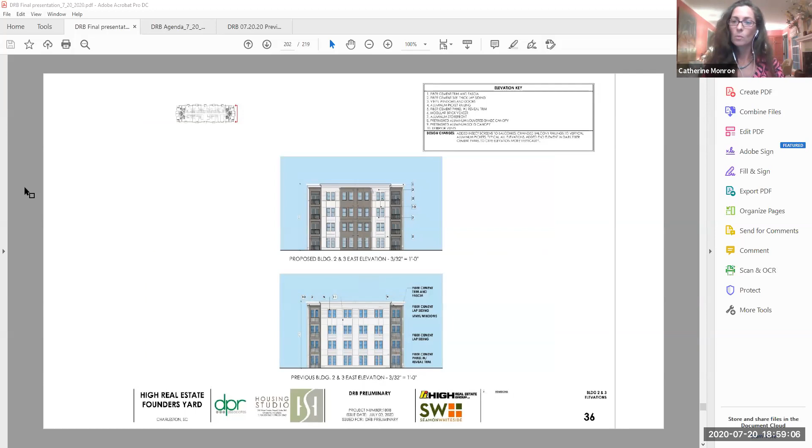Next slide, please. You can see this here again in the proposed and the previous. This really helps to break down the boxiness that we were seeing in the elevation—adding this vertical darker element to these four building elevations helps with this.

Next slide, please. We also made some changes per staff comments rendering for building 4 at the entry, again here in the center element, which is the darker element in this implied hyphen area. We've removed the brick from the first and second levels per staff comments, again to simplify the building material palette. We've also added some shade louvers up above the uppermost windows on that top level to really guide your eye up, helping to simplify the overall elevation design.

And David, can you go to 39, please? We also took staff and board comments to remove the brick at the lower and second level for the breezeway, the entry to the breezeway area, so you see this now rendered fully in dark cementitious panel. Again, this was done to calm the material palette. This is the element, as you may recall from Cassidy's presentation—this breezeway entry is where, if you're looking back up through the project, you'll see that entire serpentine path and all of the interior courtyard design moves we've done to enhance that entire space. So the entry here we really wanted to make very calm, and we appreciate that comment from staff.

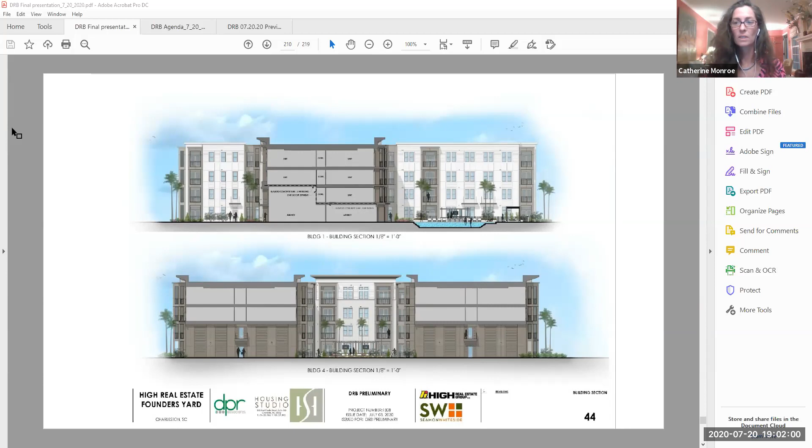Next slide, David. These are our typical window details that we wanted to include as well.

We're showing them in both veneer materials. On the left we have the masonry veneer, and in the center our cementitious veneer. We are showing the deeper recessed window, located at the second stud and the triple stud alignment. That allows us to have two layers of cementitious trim on the exterior, and we're using the extra thick cementitious material, the 5/8 inch thickness, to be very clear about the details and give the windows, since we have so many windows in multifamily, a recessed relief where that happens. We wanted to show that here.

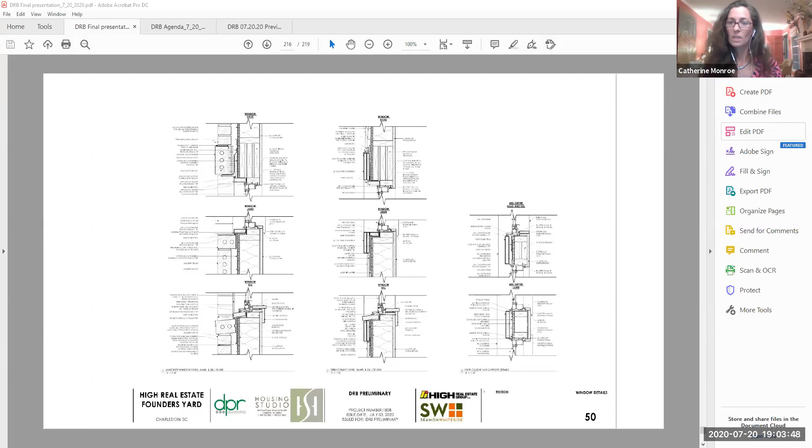Next slide, please. This is our digital material board, and I just wanted to call out a few things on this.

You should have also received a physical material board that we shipped down, so you may have reviewed that as well. First I wanted to call out the brick proposed in the lower right-hand corner of this image. This is a photograph of the brick in place as used on a building in the Charleston area.

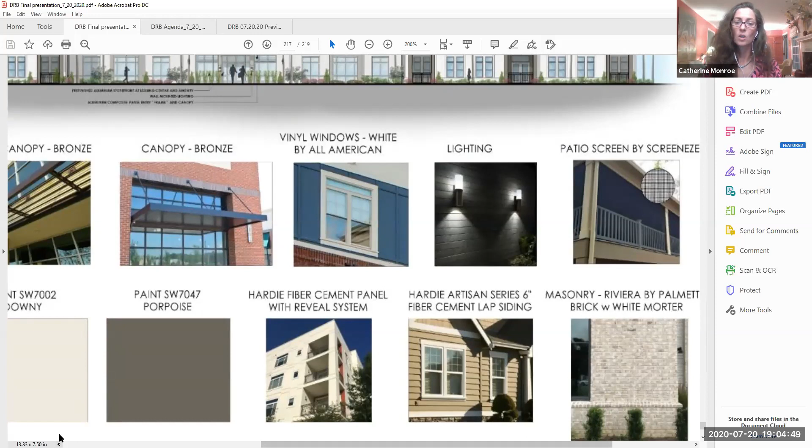We intend it with white mortar, so we wanted you all to see that. Thank you for making that bigger. Just to the left of that is an image of the lap siding and the thickened trim to give that shadow line. This is not the color palette being proposed, that's just to the left, but this is indicative of the way the shadowing would read and the way we're detailing the siding and the trim.

Also, we wanted to point out the window we'll be using. This is a locally manufactured window made in North Charleston, the Muller All-American. This is a photograph of the window as used in a previous project we designed on James Island. You should also have received a physical window sample for your review.

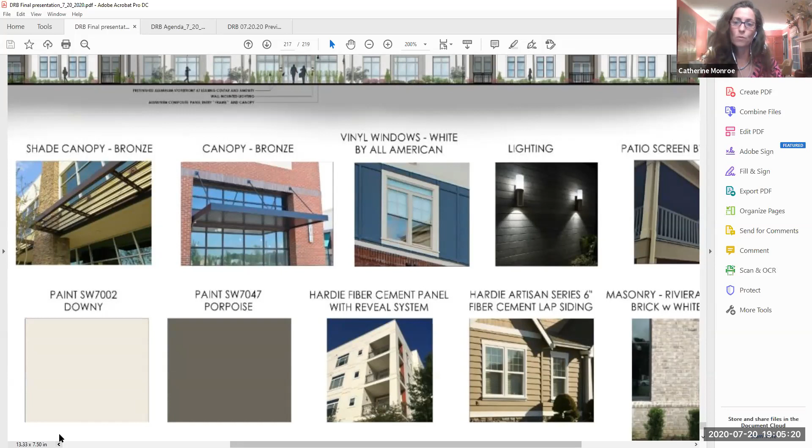With that, I believe that concludes our presentation, and I'll turn it over to questions. Thank you. Any questions from the board?

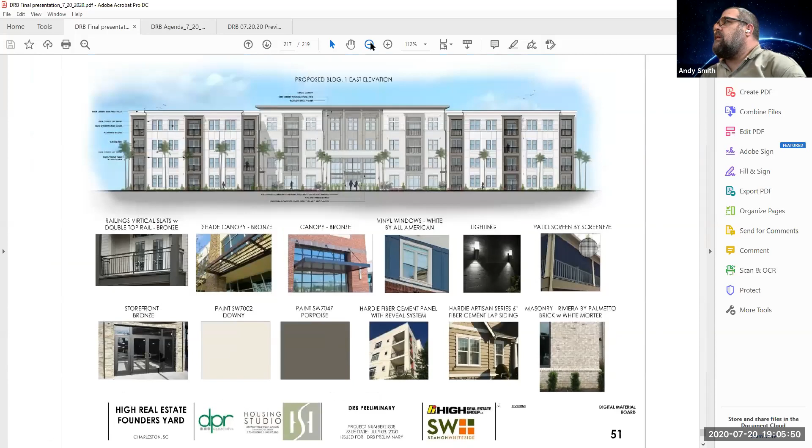Yeah, I had a question on the landscape plan. Do y'all have an actual labeled landscape plan? I see the concept in your palette, but I don't see a plan. That should have been included, and I'm not sure if we had every individual plant labeled in the technical submission, but we included the plant palette, the plant schedule with the plant symbol, in the full submission package.

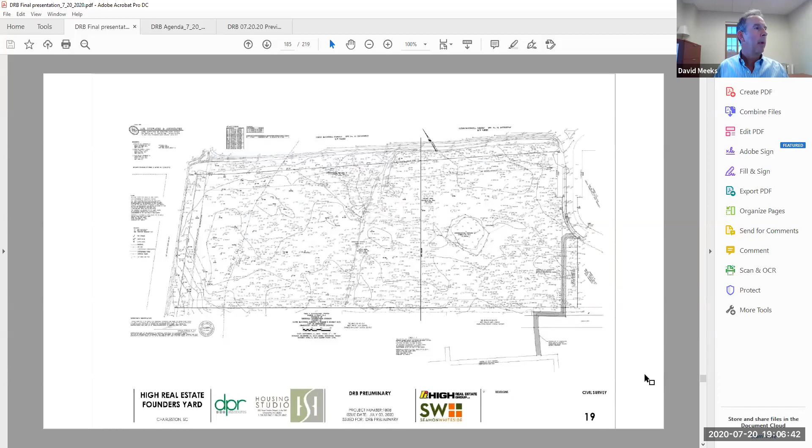Okay, I don't. David, do you know if it's in? I did include that in your Dropbox, both sets they gave me, one presentation and one a little larger. I don't have it right now, I could go get it from the network. I've got the larger set open and I don't see a fully labeled landscape plan. I don't remember, Andy, we may not have labeled every individual plant, but they should coincide with the symbols. I'm pulling up the set, I'm sorry, I don't remember what sheet it was on. I don't even see a...

Schedule. It's on, let's see. I have it here, it's at the very end of that 100-page document. L 7.02. Okay, I see it now. Thank you.

One question while we're looking into that - just curious about this reveal system, fiber cement. Is it a system, or is it something the contractor just kind of put together? Is it a system on clips or something? Yes, it has a reveal trim.

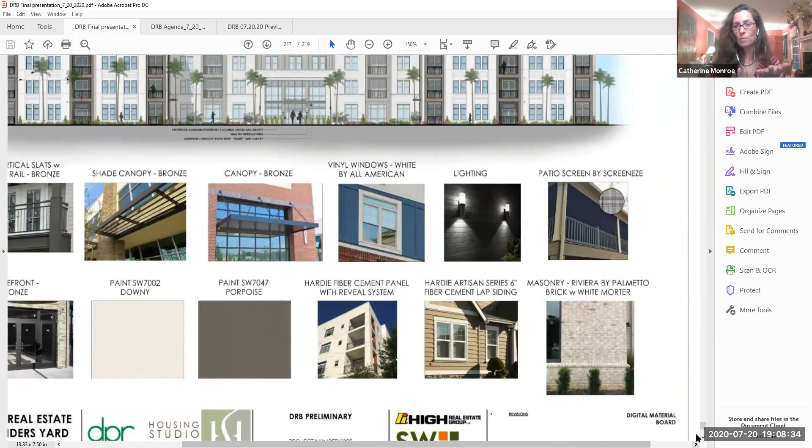David, can you advance to slide 51? We also included a photograph of this, so you can see in the lower bar of photographs - it's the reveal panel, or sorry, the fiber cement panel with a trim behind it. This was also mocked up in the physical sample material board that we shipped to you. You can see the metal trim as it sits behind and lays into the two panels of cementitious material.

Sure. Is this system been installed here locally on one of y'all's other projects? I am not positive of that. Okay.

The image that you see in this photograph is a project we designed, and that's an image of a project that's about 10 years old in Charlotte. Got it.

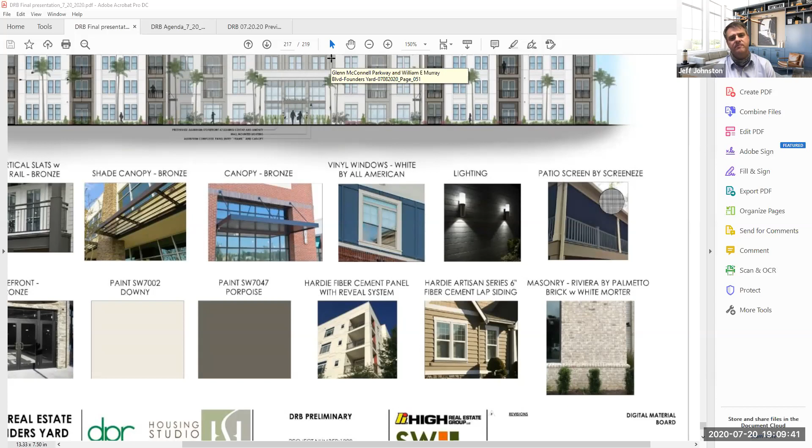One of the challenges around here, and we'll talk about that later - there's plenty of projects that have used this system, but as a warning to you to look out for quality, a lot of those, because of our high wind zone, the fiber cement panel needs fastening like every 4 or 5 inches, and those are just hard to putty and look right. Again, it's a product that's been used all over the county, so I can't tell you not to use it, but it does come with some challenges in terms of craft and quality.

Any other questions? Yes, Catherine, thank you. This is Dinos Liolio. Can you talk a little bit, just because of the massing of the buildings, lighting - what is your lighting scheme as far as the project is concerned?

We are currently showing, I believe we submitted in our larger presentation, 3 different fixtures. So at the front of the project, David, if you could go back to slide 23. And we're currently working through this right now in terms of design, but actually, sorry, if you could advance one more slide please. Oh sorry, one more. Or, no, can you go to, let's see, 25, I think.

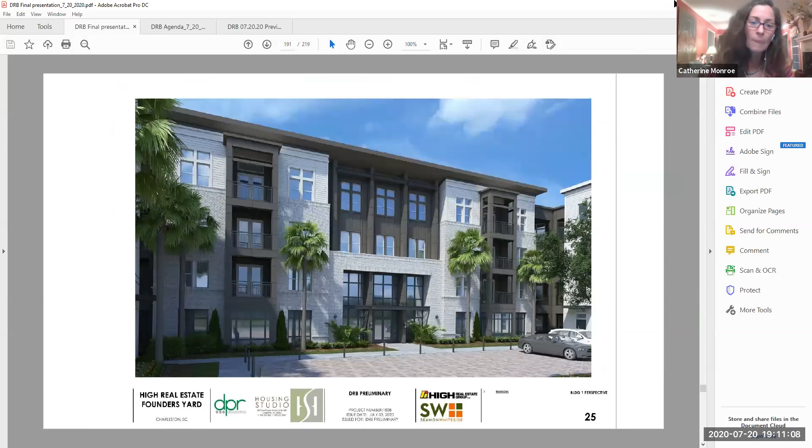There we go. So we're showing very subtle lighting, what we wanted to select, and what we're showing in the larger submittal are bronze finished lighting. We have 3 - we have one that is sort of an acrylic top and bottom, and that would be located here at the doors.

It looks like the cut sheets are on page 77 of the full presentation. We intend to have those sort of brighter, more glassed fixtures at the front entry. And then we also wanted to have uplighting, very subtle, for the fins that you see here on the entry. That would not be seen, and it's something that we're still working through.

So since it's not applied to the building, it would just be very subtle - we didn't put it in this submittal. It would be located behind the brick veneer there. But the primary lighting package would be those that you see in the submittal on page 77, with the entry sconce being the acrylic top and bottom, and then going to a more subtle sconce, the full can, at some of the areas that are less publicly used, like the exit only doors, where we still wanted to have lighting there, but downplay it a bit. We want the primary focus for the lighting to be at the building entries.

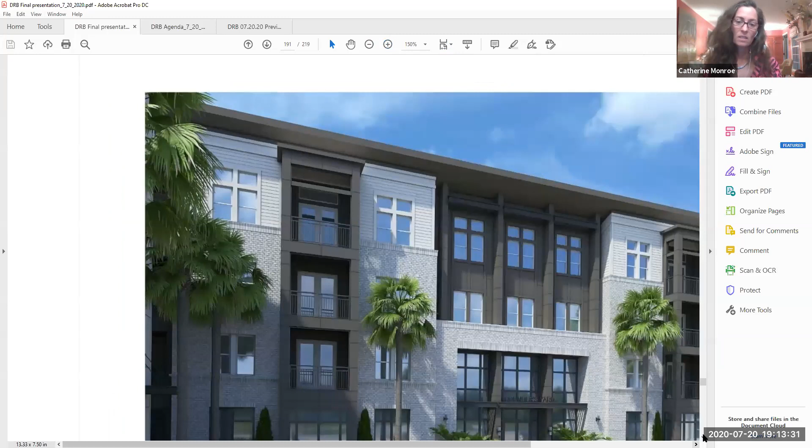Right now we're showing a signage - the canopy sign there with the name of the project, Founders Yard, finished in the same tone, the same color as the canopy itself. Right now that's the only signage that we have shown at this time. There's a monumental sign for the project out at the street level, and that's been called out in the site plan.

You can start to see the lighting there too. Yeah, if you zoom in. Yeah.

Any other questions? While we're on the slide here, I'm curious about the concept of the brick arch going over that canopy you just described. What's the story with that?

So with this being the entry and the primary focus where everybody is coming in, the first impression, we wanted to call out that entryway as something slightly different than the other implied hyphens existing around the buildings and the project. That bar bridge, I guess you'd say, of masonry is intended to read as punch-through, so you get that depth of shadow that's a little more dramatic. We wanted it to also feel anchoring at the same time. So those were some of our intentions around that element.

Okay, thank you. Any other questions?

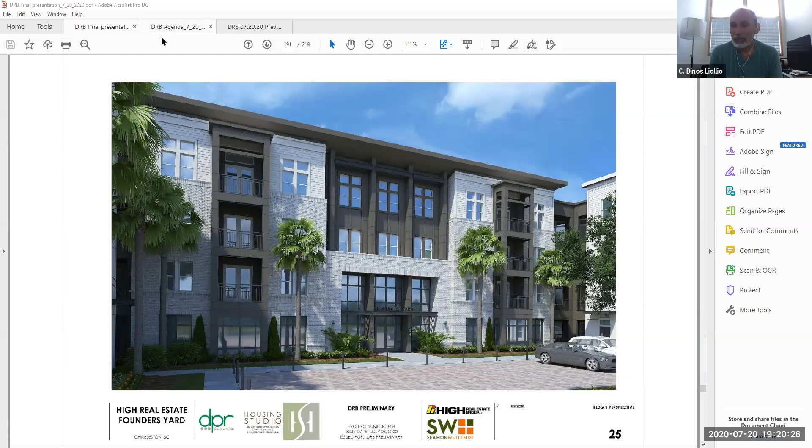Wonderful. This was a tough meeting. Thank you, everyone. I did get my audio resolved. I didn't tell you all, but the guy who was up here fixed it. I could hear you all fine. Good. Good. Very good. Are we still...